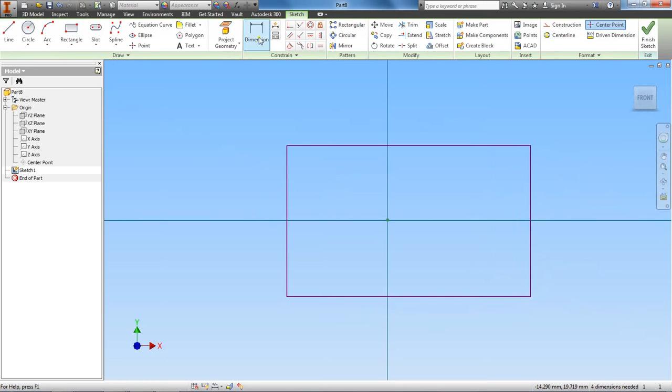I'm going to use the metric units here. Right. Start my sketch and choose the XY plane. And let's go ahead and grab a rectangle using the 2-point function. And it's okay. And then dimension your rectangle. The width, we'll make this 89 millimeters. And then the length, we'll make this 140.

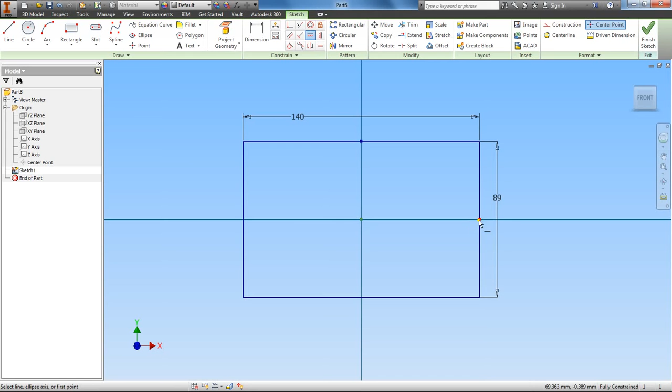Okay. Let's go ahead and make this symmetric about the origin. Use the vertical constraint. Yep. And then the horizontal constraint. Oops. Go here first. Then here. All right. Click OK. Finish the sketch. Now let's extrude our sketch to 13 millimeters.

And then let's go ahead and orient your view cube to the bottom, and make sure that bottom is upside down, right? Just as you see here. And then on the surface, start a new sketch. And again, grab the rectangle, the 2-point feature. And when you start your rectangle, you want to start at the origin. In other words, the lower left-hand corner of the cube that you've previously drew. Left click. And then make sure that it's the same length as the cube that you drew before.

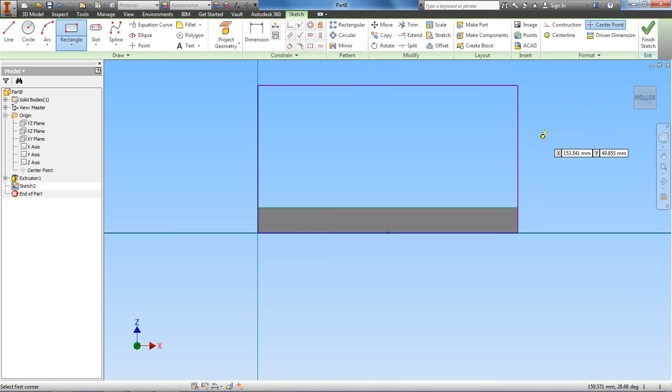So 140. And then we can go up. Let's just go up about 76 here. And then click OK. And then we'll dimension this side here to 127. Okay. All right. So now you see that we have a surface that is perpendicular to the surface here. Go ahead and finish the sketch.

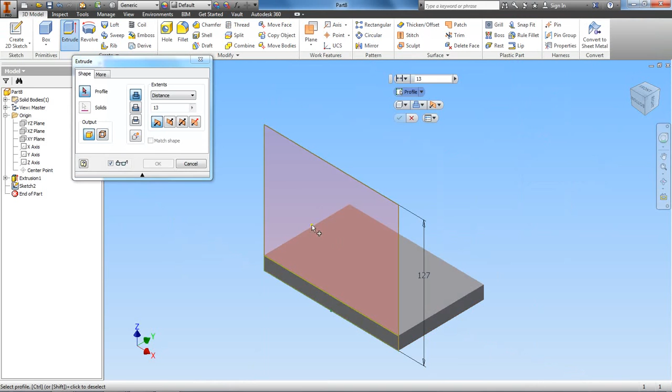Now let's go to extrude again. And this time we want to click this top surface here, this top area here. Left click, and notice that it's extruding away from our part. And so to fix that, we want to change the direction, and so now it's going toward the part. Then click OK. And so now you see you have two surfaces that are perpendicular to each other.

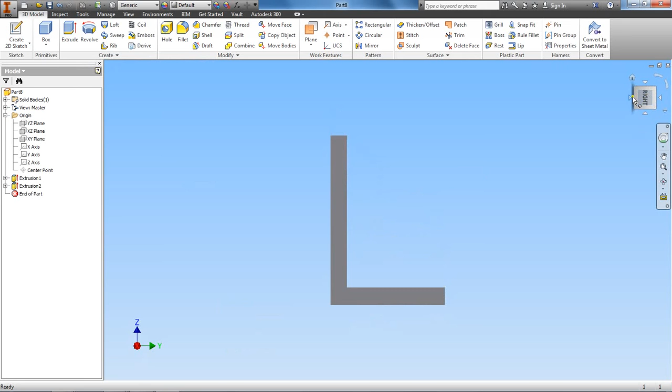And next, let's go to the top side. Make sure this is right side up. Make sure this is correct. Yep. Make sure this is right side up. And then on this piece here, if I put it at an angle, you can see that I'm on the top surface of this part here. Go ahead and start a new sketch.

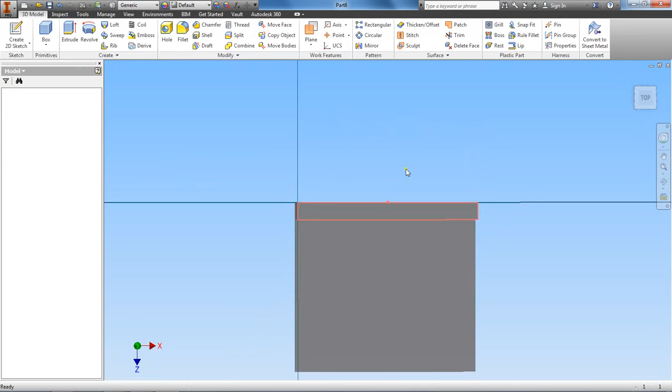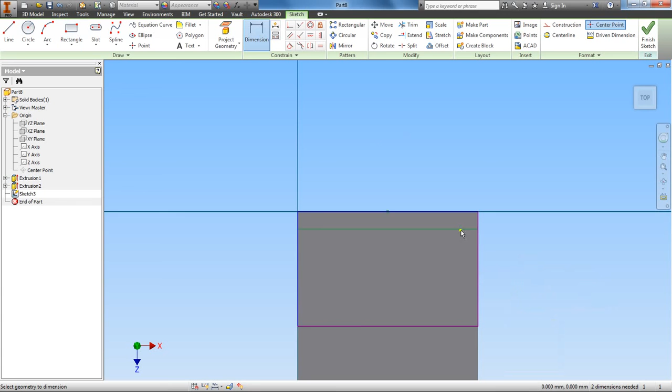All right. Grab another rectangle, 2-point, and this time start your point at the origin. Again, you can tell when you're at the origin because your dot is green. Left click and make sure it's the same width, and then 140. All right. Then grab your dimension tool. All right, and we want to make this go down 89 millimeters. Let's finish the sketch. And let's go ahead and do this. All right, so you can see now this surface is perpendicular to this surface.

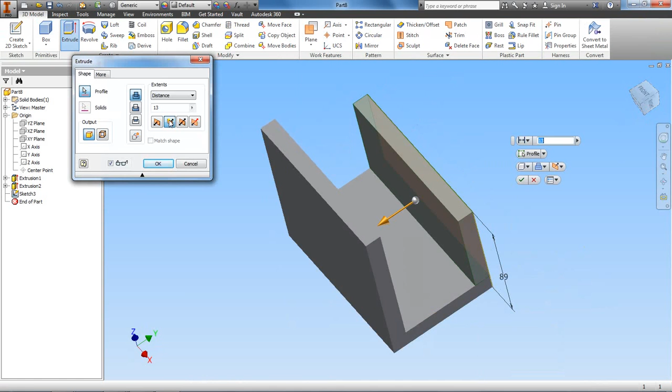And then we'll use extrude. And let's go ahead and I'm going to click this region here. And again, you notice that usually by default, when you extrude, it extrudes away from an existing surface. So we just go up here and change the direction and make sure that's 13. All right. And so now you have a flange.

Okay, and so many parts that you design have perpendicular surfaces, and I just want to make this quick tutorial just to show you how to efficiently create surfaces that are perpendicular to each other.